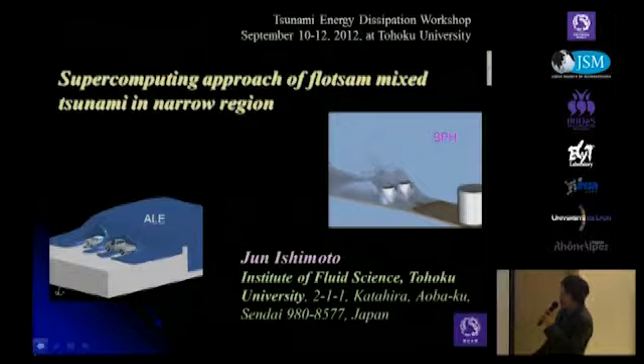First, the background. In recent tsunami simulation studies conducted by oceanic scientists, they generally deal with a wide region spanning several hundred kilometers, using governing equations for analysis such as shallow water theory. Although conventional simulation techniques successfully predict tsunami height and inundation area using shallow water theory, the impact force exerted on object structures cannot be accurately predicted. Especially for predicting damage to land and buildings in relatively small areas, such as industrial plants, it's not possible to apply conventional simulation procedures.

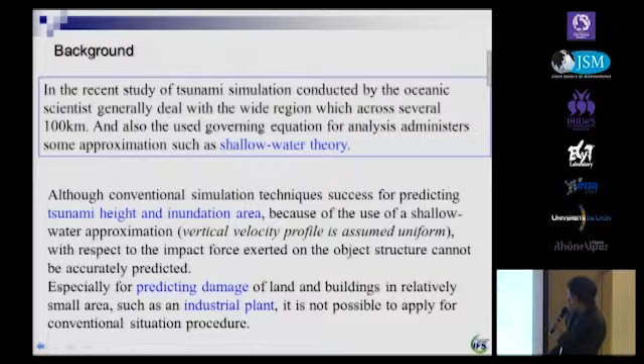The March 11th earthquake is further believed to have produced a mixed tsunami with rubble brought by the leading wave, and the outflow of flotsam by backwash greatly increased destructive power compared to a normal tsunami. So in the present study, a fully hydrodynamic approach without shallow water approximation is applied to compute the flow characteristics of mixed tsunami accompanying flotsam and debris. Furthermore, mixed tsunami damage prediction to the structure by the leading wave and outflow backwash of flotsam, and geometric structure placement optimization, are performed by supercomputing implementation.

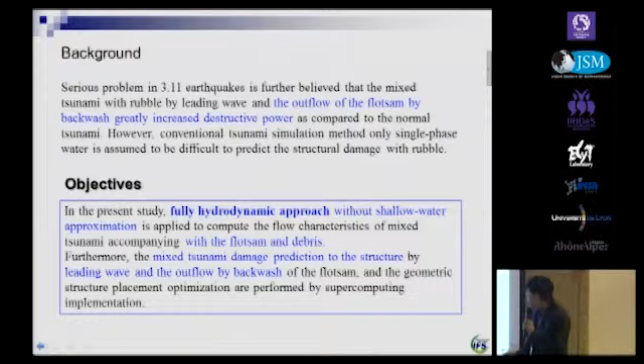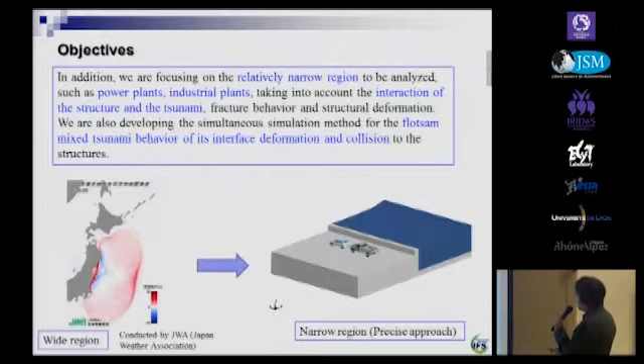In our study, we are focusing on a relatively very limited localized region. This region is assumed to represent power plants and industrial plants, taking into account the interaction of the structure and the tsunami, fracture behavior, and structural deformation. We are also developing simulation methods for flotsam mixed tsunami behavior, interface deformation, and collision with structures. So in general, tsunami simulation is performed in a wide region, but we are focusing on a very localized small region.

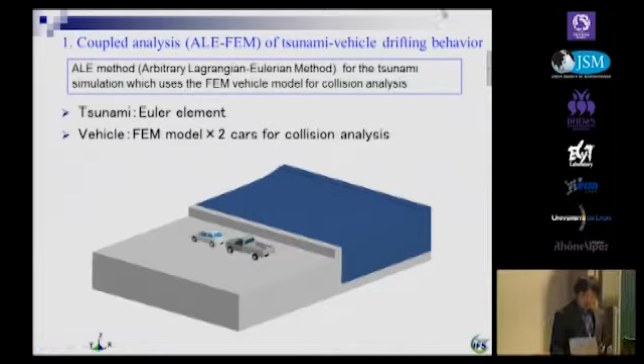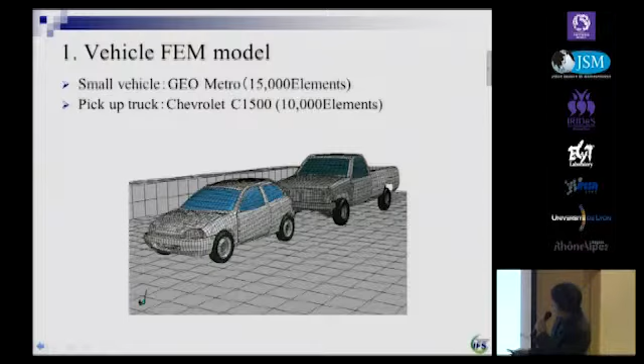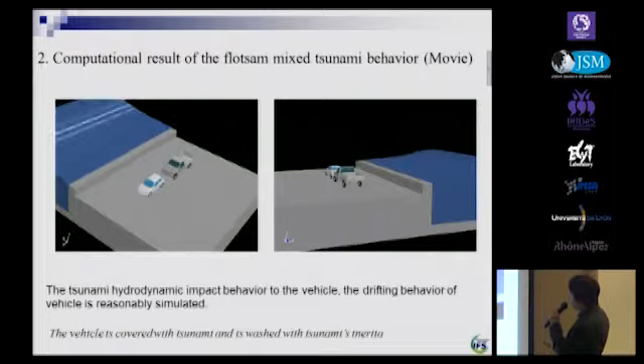This is the simulation result of the flotsam mixed tsunami behavior. The tsunami's hydrodynamic impact on the vehicle and the drifting behavior of the vehicle is reasonably simulated. The vehicle is covered with tsunami and is washed away by the tsunami's inertia effect.

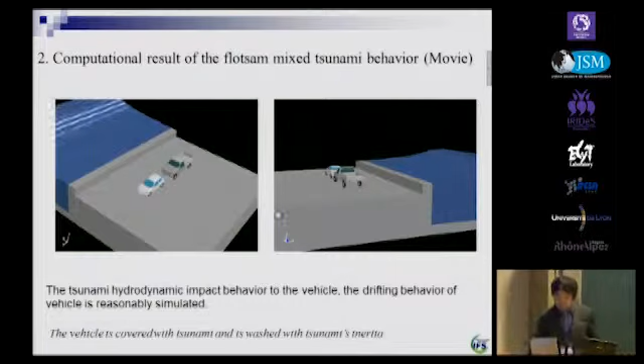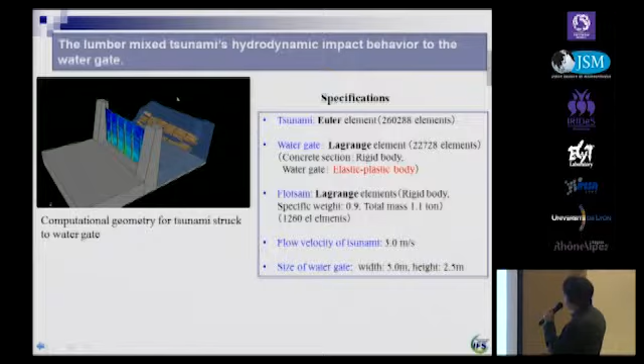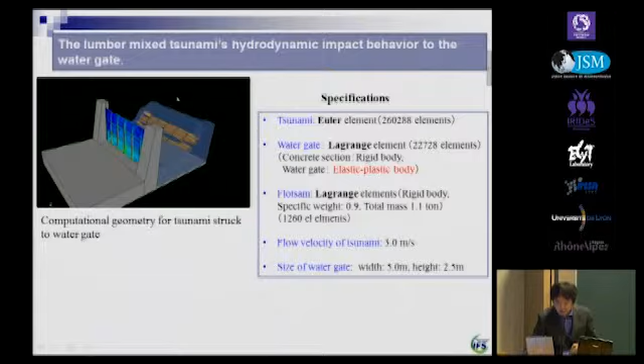This is the numerical result. The lumber mixed tsunami's hydrodynamic impact behavior to the water gate.

This is a single phase tsunami without flotsam case. And this is a mixed tsunami with lumber case.

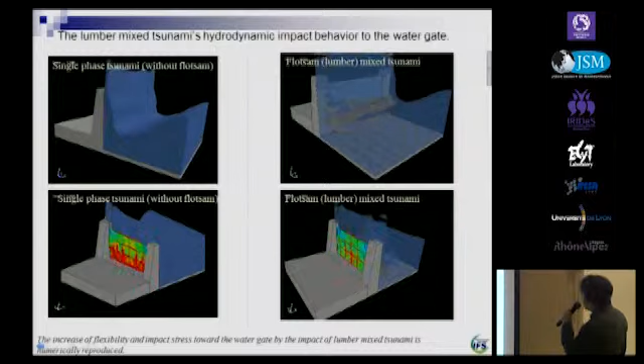The increase of the flexibility and impact stress. This color contrast shows impact stress towards the water gate by the impact of the lumber mixed tsunami is numerically reproduced.

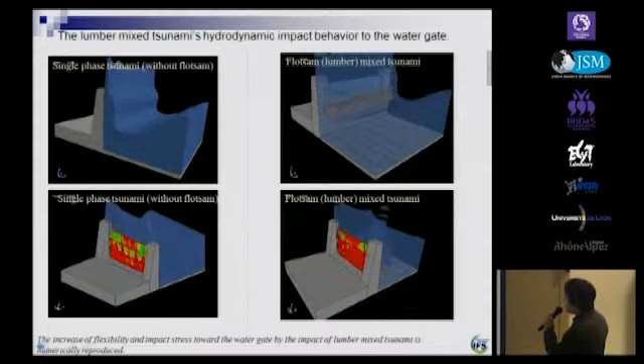From these simulations, we computed the effect of flotsam lumber mixing to tsunami on impact force to the water gate.

This red line shows the mixed tsunami's case, and the blue line is the impact force of the single tsunami's case. It is clear that the mixed tsunami's impact force increases significantly compared to that of the single phase tsunami.

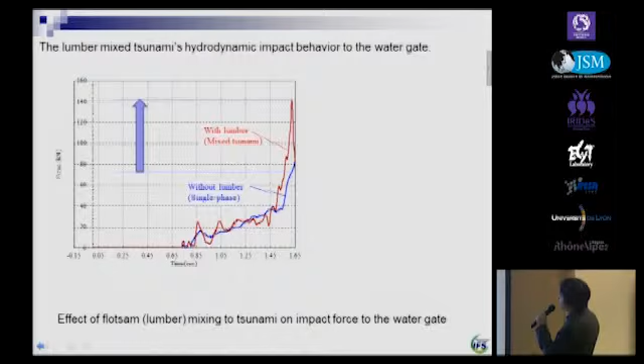So the magnitude of the impact force of lumber mixed tsunami increased to twice that of single phase tsunami's impact force.

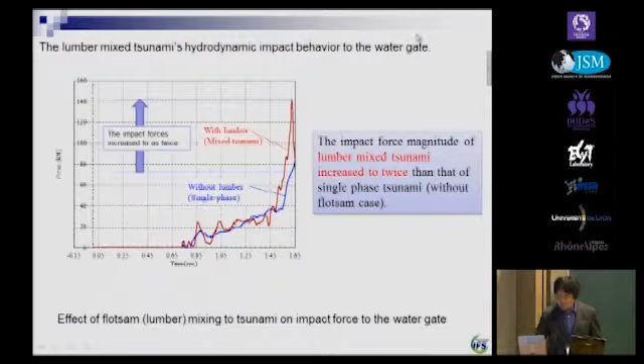Next simulation, we perform a different approach using the computational results of flotsam mixed tsunami behavior by the SPH method. SPH means smoothed particle hydrodynamics method.

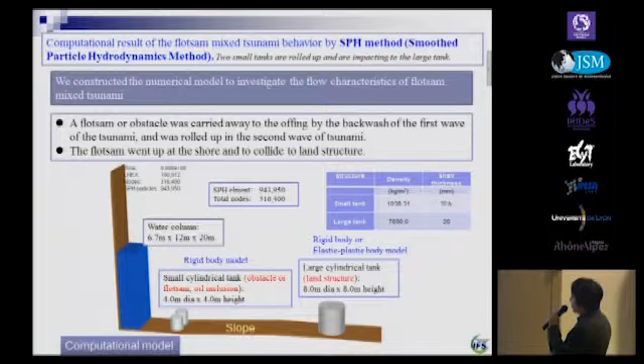We assume the numerical model like this. The two small tanks rolled up and impacted the large tank.

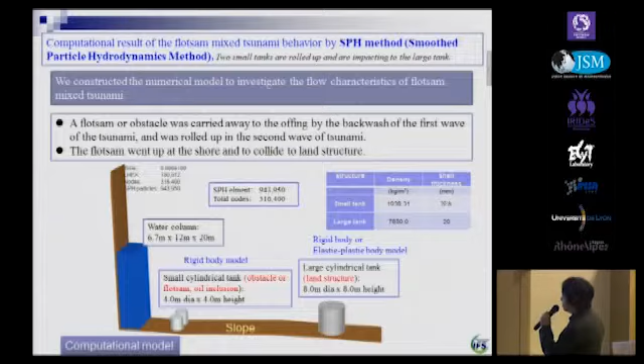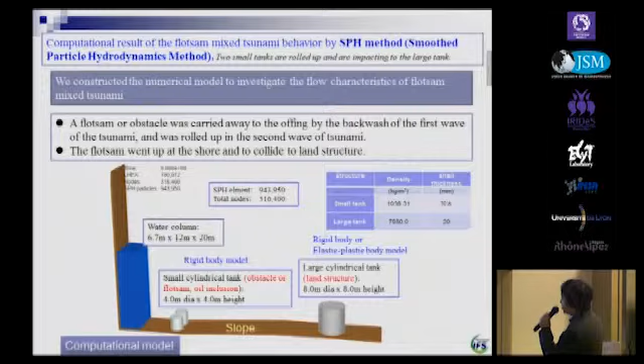We constructed the numerical model to investigate the flow characteristics of flotsam. Flotsam means this small tank, in the flotsam mixed tsunami case. We assumed two assumptions: the flotsam obstacle was carried away by the backwash of the first wave of tsunami

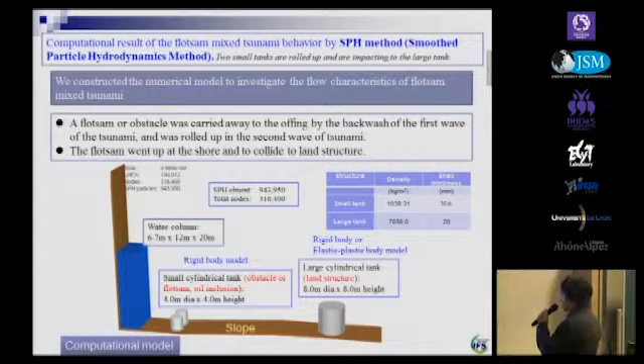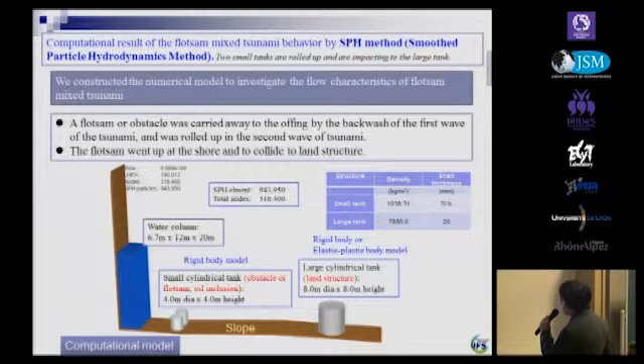and was rolled up in the second wave of tsunami. The flotsam went up on the shore and collided with the land structure. Land structure is assumed to be this large tank.

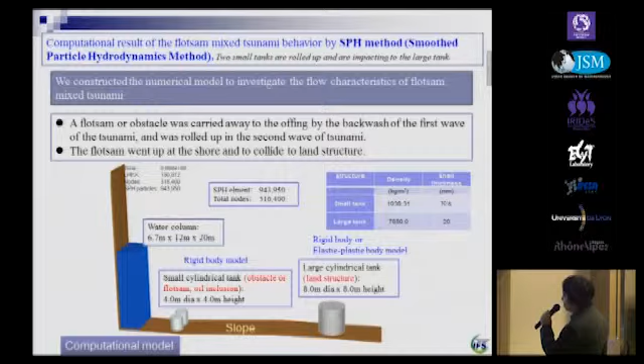The small tank is assumed to be a rigid body model, and the large tank is assumed to be either a rigid body or an elastic plastic model.

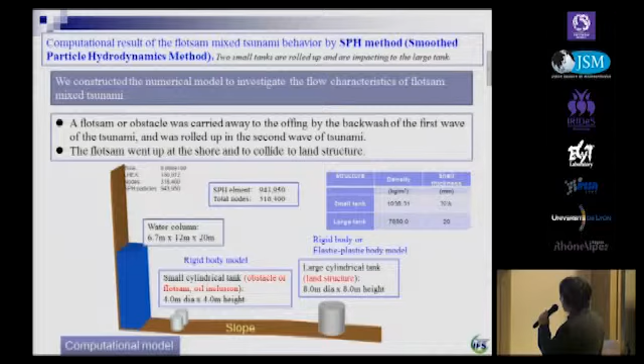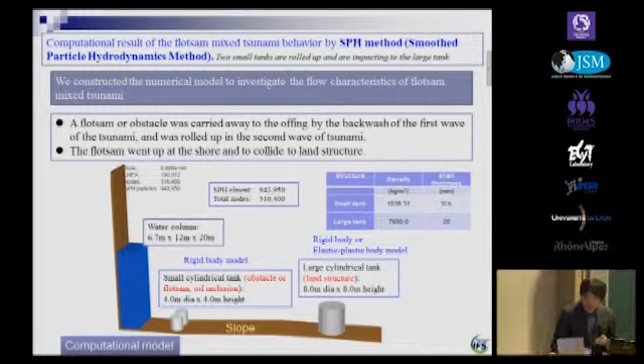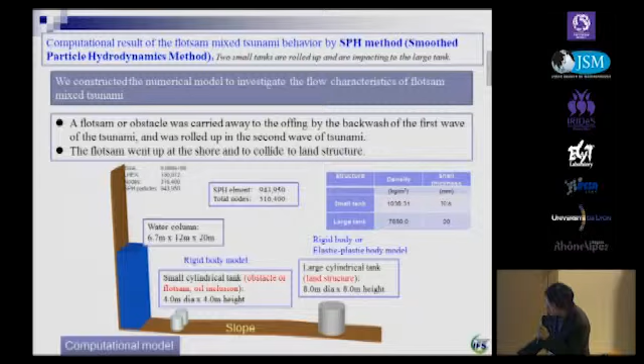This plane is settled by a slope, a very short slope.

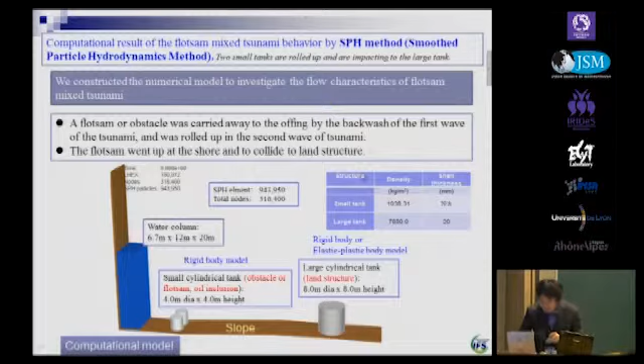This is the simulation result. The flotsam mixed tsunami flow.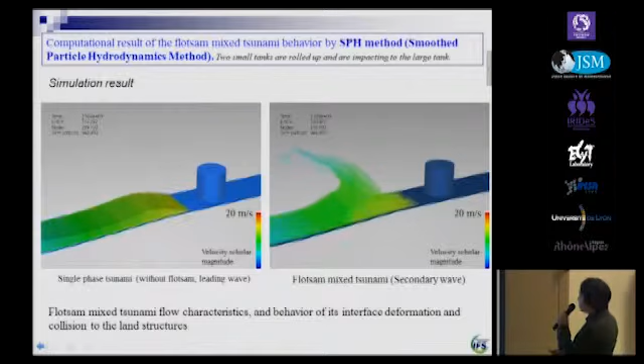This is the case without flotsam, namely the single phase tsunami case. And this simulation result is the flotsam mixed tsunami case.

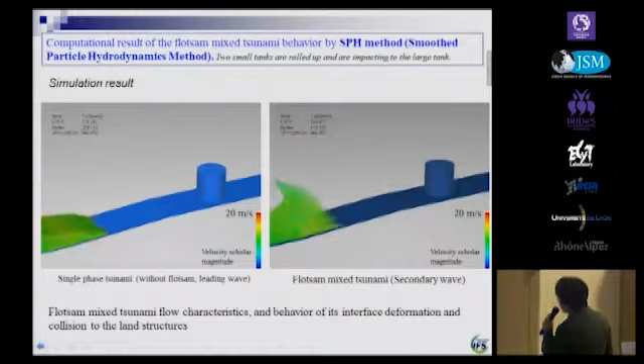The flotsam mixed tsunami flow characteristics and behavior of its interface deformation and collision to the land structures are clearly reproduced by these simulations.

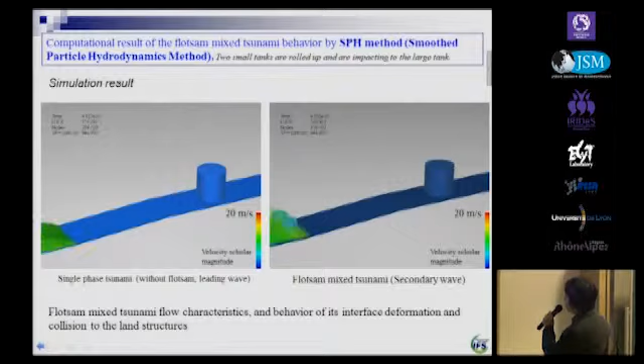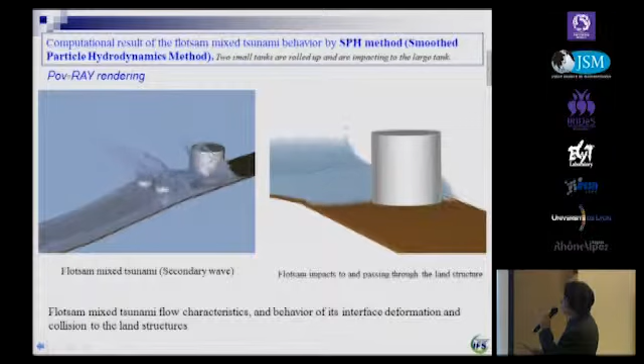This is a POV-Ray rendering result. This is a two columns case, and this case is a flotsam impact and passing through the land structures case.

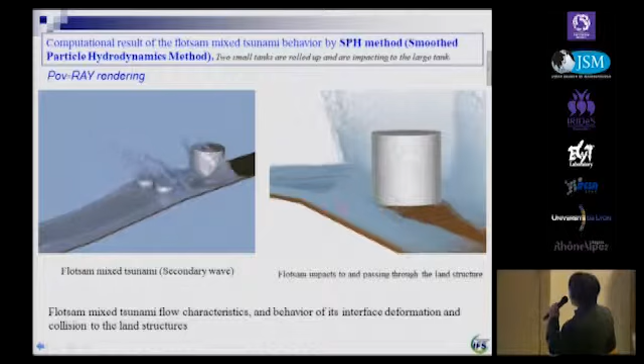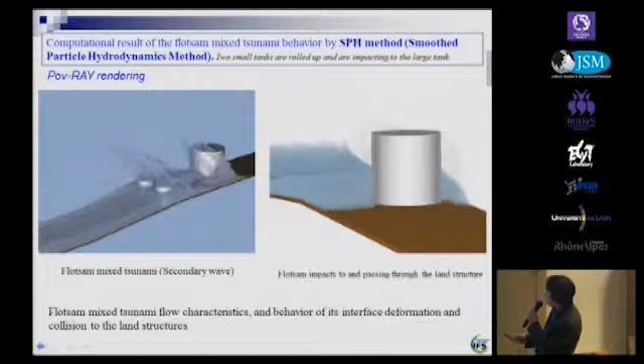The behavior is clearly and reasonably reproduced by this numerical technique.

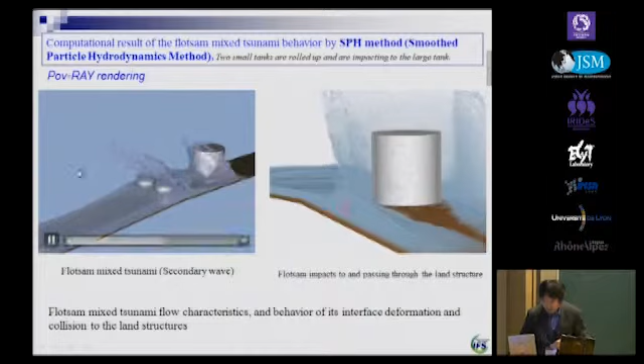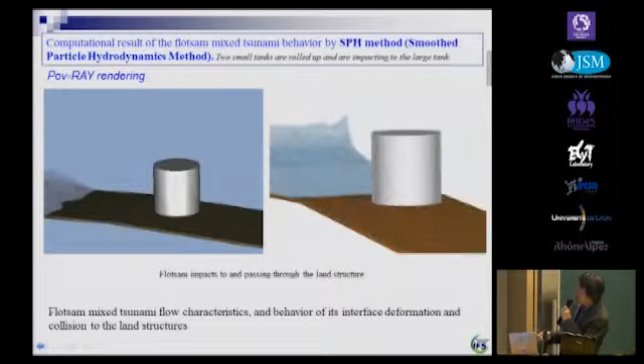This is a different view of the case. This is flotsam or debris.

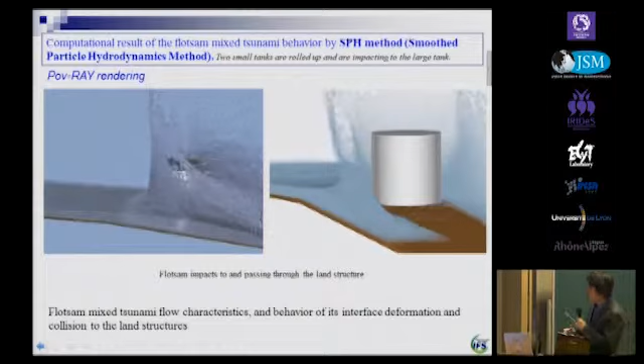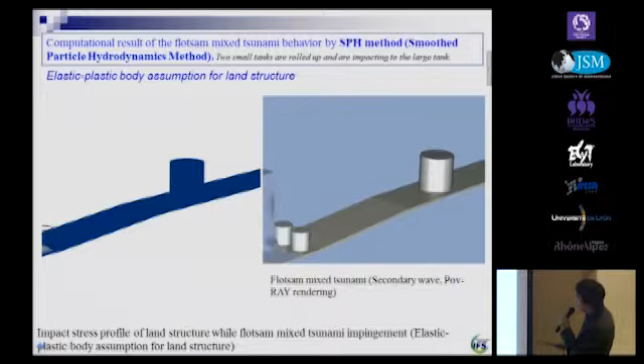Next simulation, we assume the large tank is an elastic plastic body, to investigate the impact stress profile of the structure while the flotsam mixed tsunami impingement occurs.

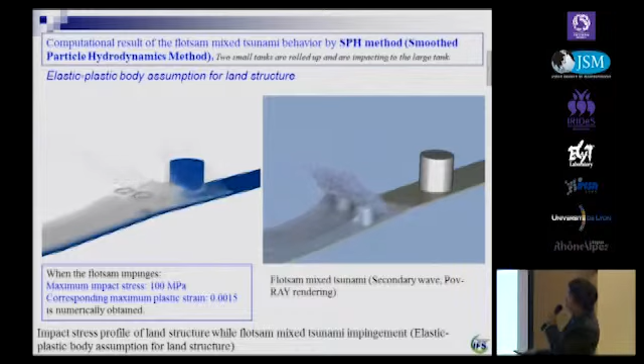When the flotsam impacts the structure, the stress suddenly increases.

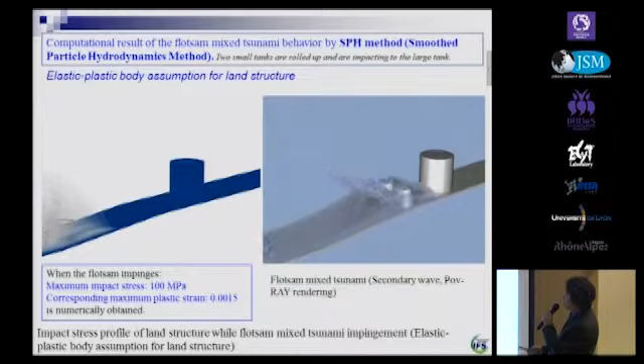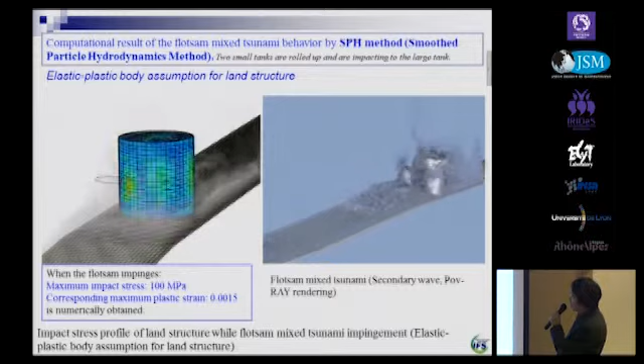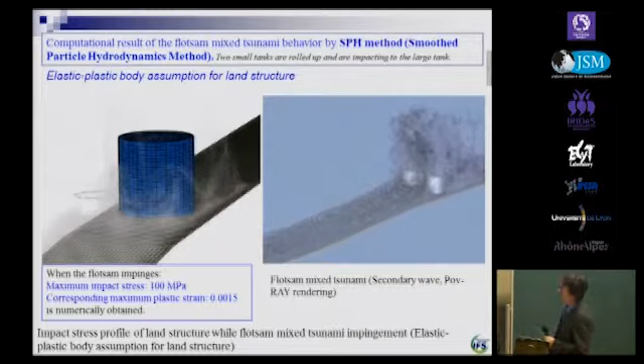The maximum impact stress obtained is 100 megapascals, and the corresponding maximum plastic strain is this value. This color contour shows the stress.

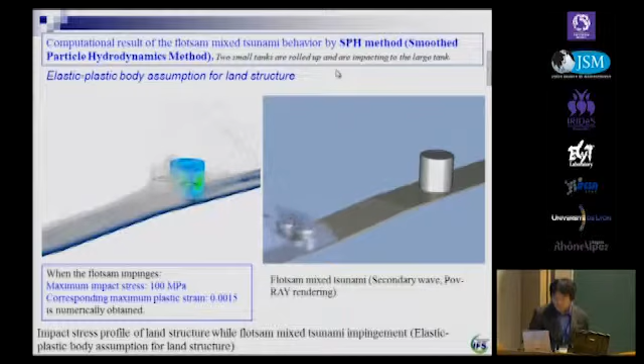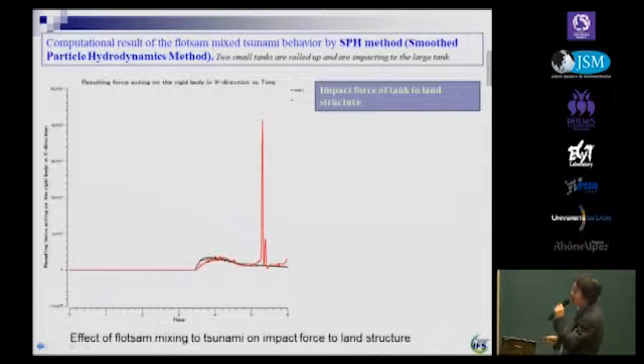According to these simulations, we predicted the impact force of the tank on the land structure. This black line shows the single-phase tsunami, namely the without-flotsam tsunami case.

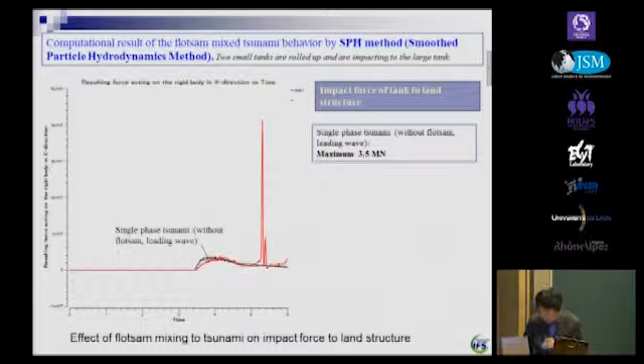The impact pressure is not so large compared to the red line case. The red line case is the flotsam mixed tsunami case, and we obtained the maximum impact force.

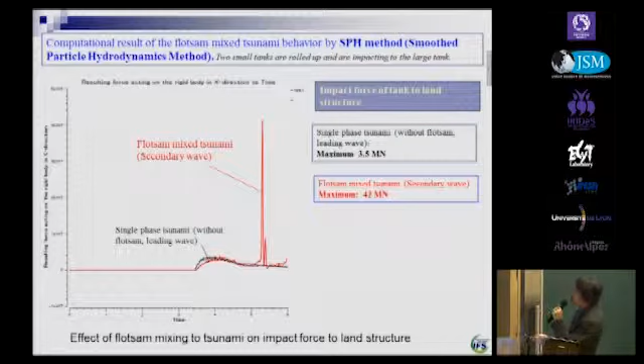The single-phase tsunami has a maximum of 3.5 meganewtons, but the flotsam mixed tsunami's maximum impact force is predicted to be 42 meganewtons.

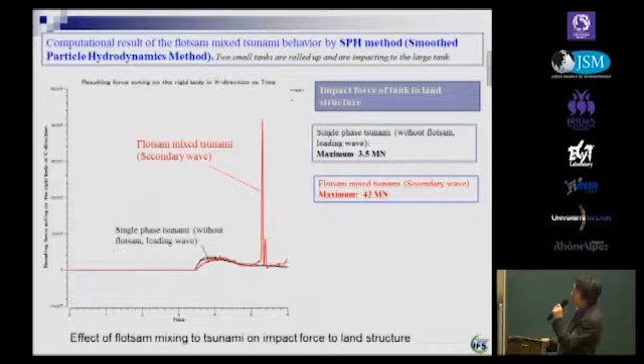So the impact force magnitude of flotsam mixed tsunami becomes over 10 times that of the single-phase tsunami's case.

From these results, the impact force is controlled by the density of the tank and the inertia effect, which acts due to the inertia effect of tsunamis acting on the flotsams.

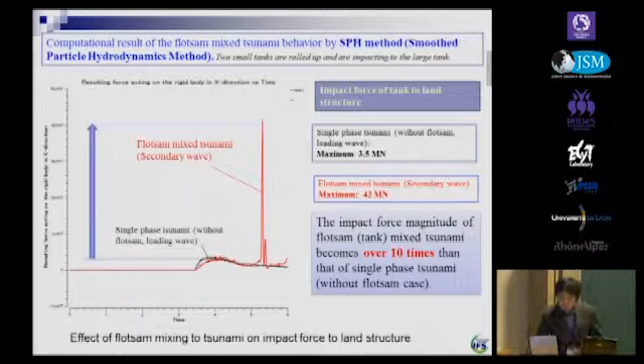Conclusions: two different computational methods were performed, and the tsunami's interface deformation and collision behavior with the land structure are reasonably reproduced.

And the impact stress profile of the land structure, while flotsam mixed tsunami impingement occurs, is predicted. As a result, the impact force magnitude of flotsam mixed tsunami becomes over 10 times in maximum than that of